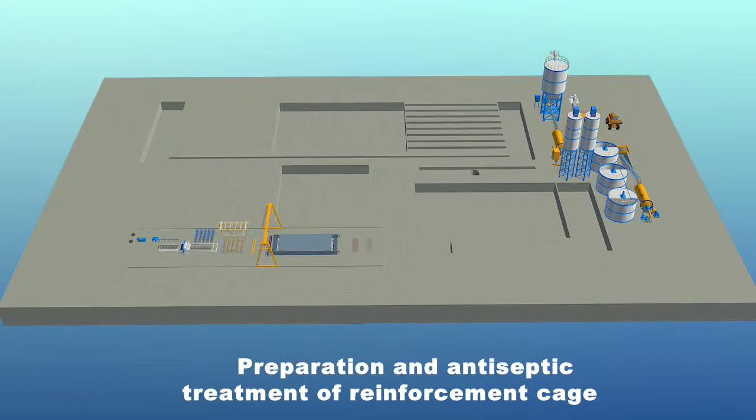Dongyue Machinery Group Aerated Lightweight Concrete (ALC) plate production line has the following 6 sections: preparation and storage of raw materials, preparation and antiseptic treatment of reinforcement cage, batching, pouring and rod inserting, static curing and rod extraction, cutting and regrouping, autoclaved curing and finished product processing, etc.

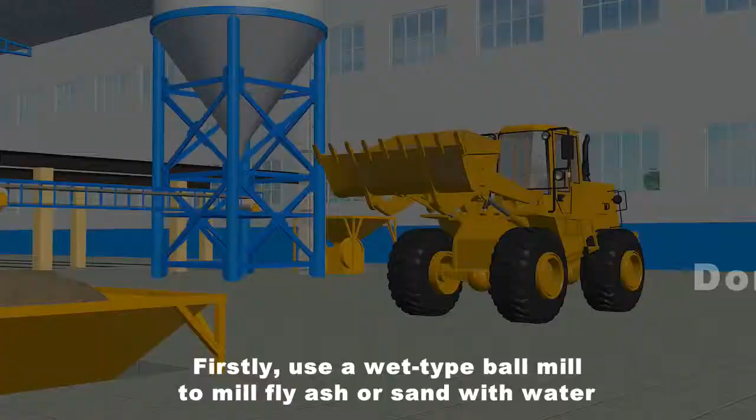Firstly, use a wet-type ball mill to mill fly ash or sand with water into a certain concentration of slurry and store it in slurry tanks.

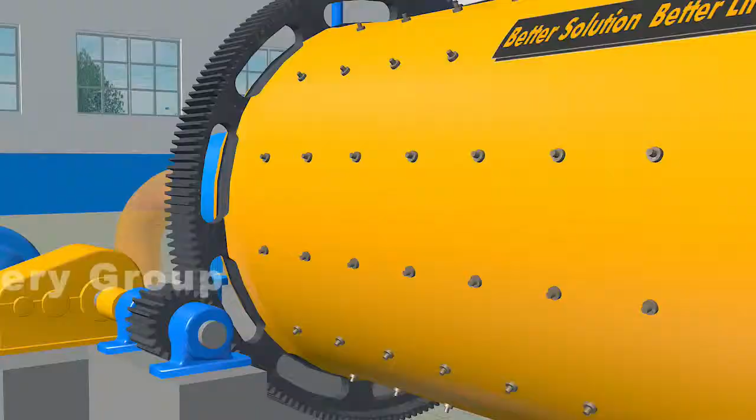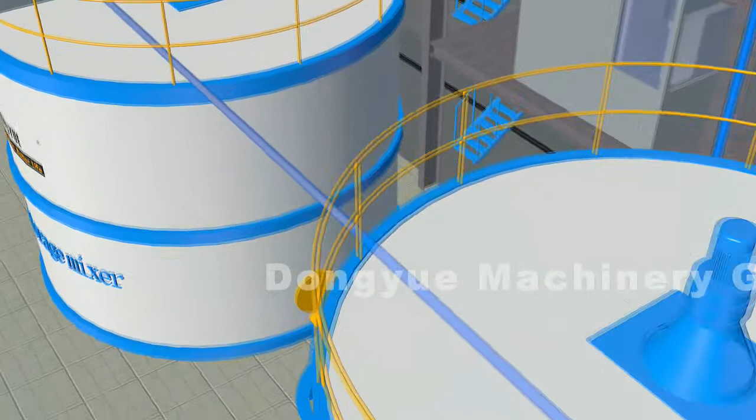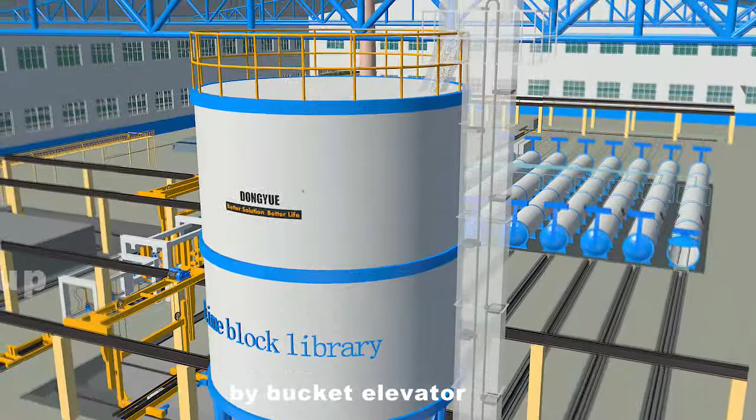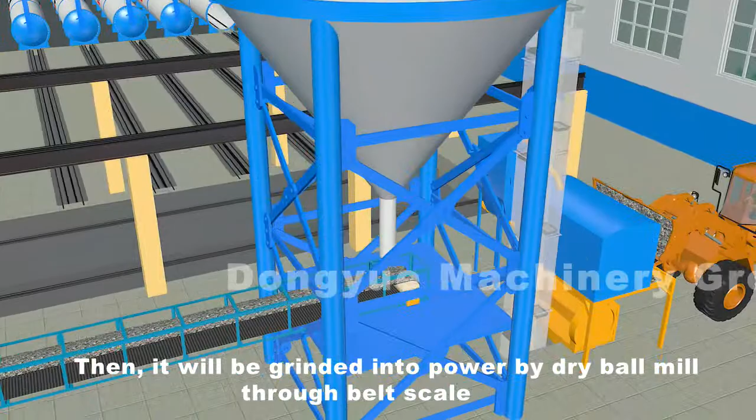Limestones are loaded into a jaw crusher for crushing and stocked into the lime block silo by bucket elevator. Then it will be ground into powder by a dry ball mill through a belt scale.

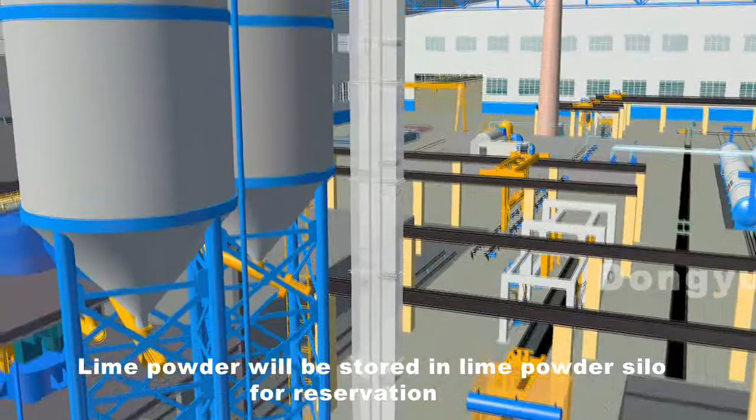Lime powder will be stored in the lime powder silo for reservation. Raw material preparation and transportation processes are equipped with dust cleaners to ensure the environment is free from pollution.

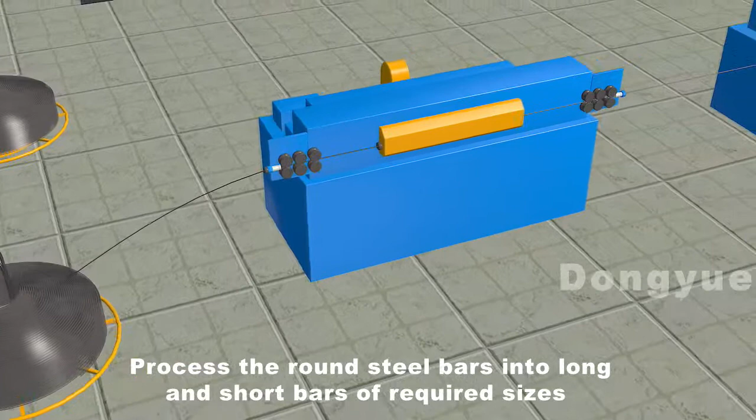Process the round steel bars into long and short bars of required sizes with a straightening cutting machine. Put these processed bars on the net welded machine frame for automatic welding.

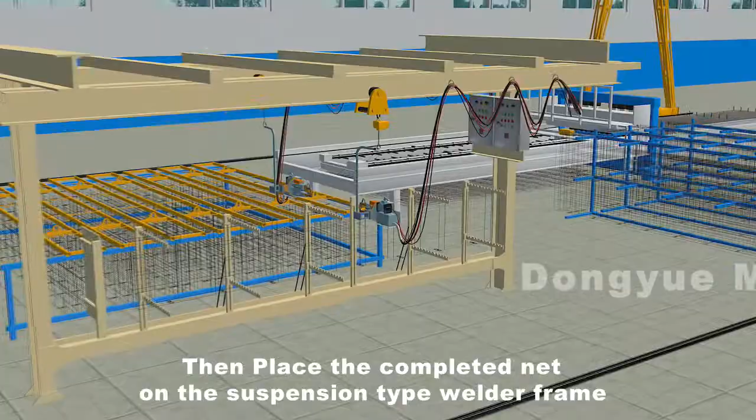Then, place the completed net on the suspension-type welder frame. Adjust the dimension and location, and weld the required mesh cage with the mesh welder, lifting the cage to the groove for dipping paint of corrosion remover by a special cage sling, ensuring that the surface of the cage is fully painted with the remover.

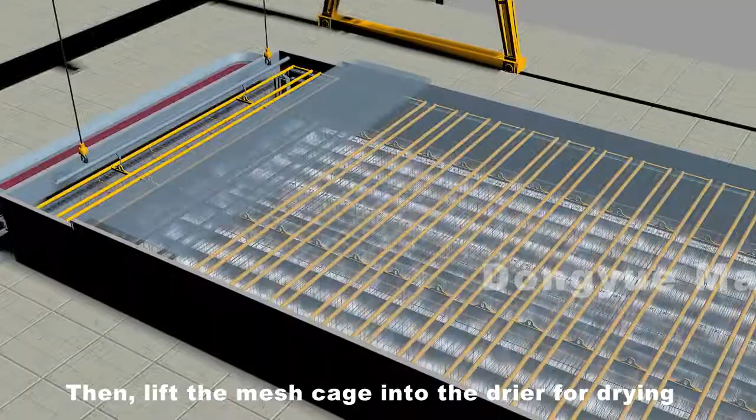Then, lift the mesh cage into the dryer for drying. After drying for 10 minutes, lift the mesh cage to the assembly area for assembling.

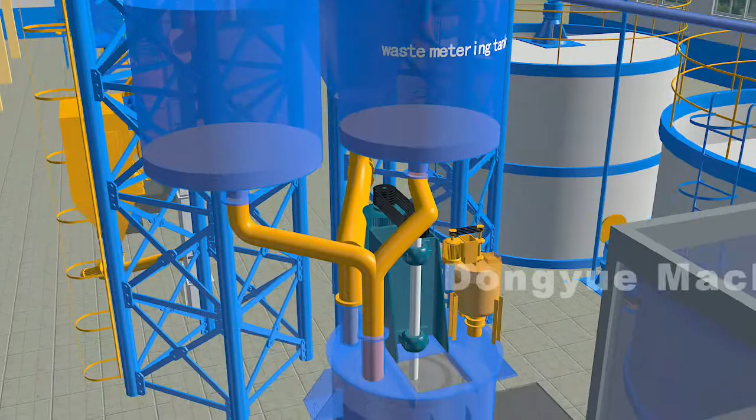Slurry is measured by a slurry scale, lime and cement are measured by a dry material scale, and aluminum is measured by an aluminum scale. Pour the above raw materials into the pouring mixer by order. After 2 to 3 minutes of high-speed mixing, pour into the mold box.

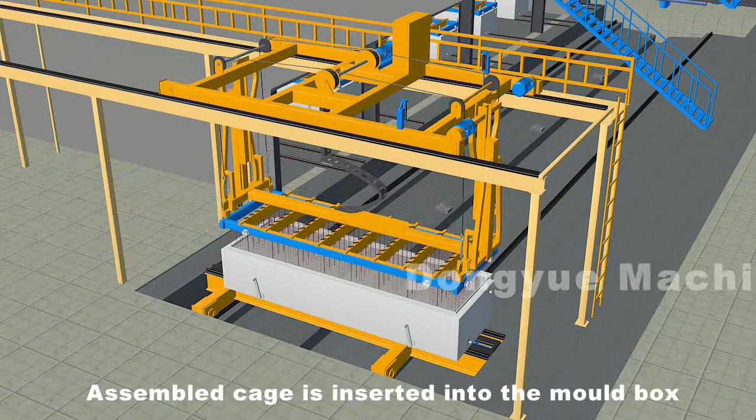When the pouring is completed, the ferry car carries the mold box to the place for rod inserting. The assembled cage is inserted into the mold box by the rod inserting hanger. The position of the mesh cage is fixed by steel bars.

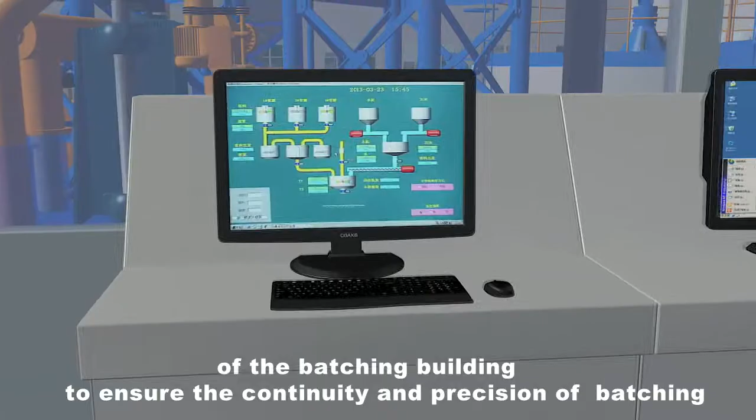The processes above are under the integrated control of the batching building to ensure the continuity and precision of batching, pouring, and rod inserting. After rod inserting for the mold box is completed, convey the mold box with the friction gear.

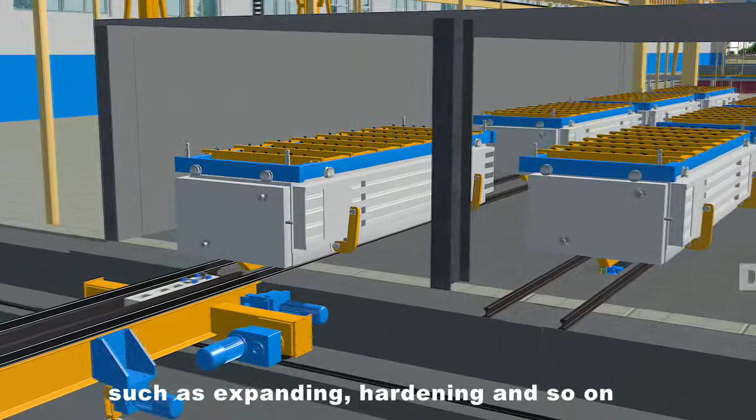To the static curing room for 2 to 3 hours of storage. A series of physical and chemical changes, such as expanding and hardening, happen to the slurry in the mold box under the function of lime, cement, and water.

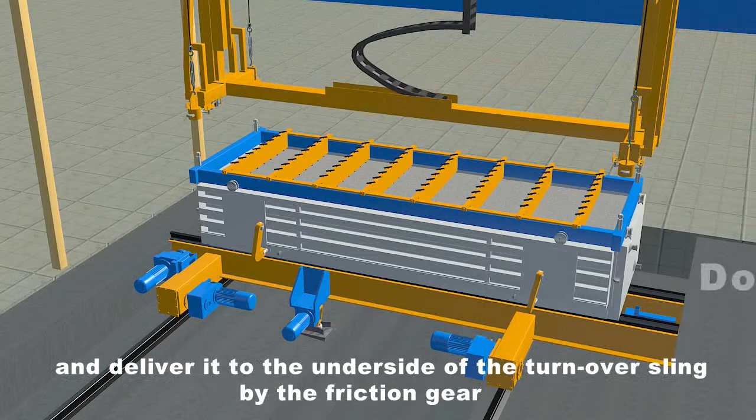When it reaches the strength for cutting, convey the casting box with the friction gear to the place for rod removing. Then remove the whole rod frame with the rod removing sling and deliver it to the underside of the turnover sling by the friction gear.

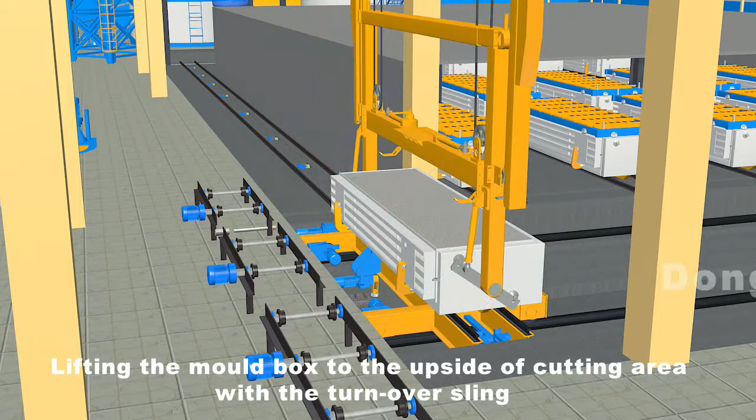Lifting the mold box to the upside of the cutting area with the turnover sling, turning the casting box by 90 degrees with the turnover equipment, and laying the casting box sideways on the number 1 cutting trolley. Then the mechanical arm of the turnover sling will automatically unlock the locking arm and achieve demolding.

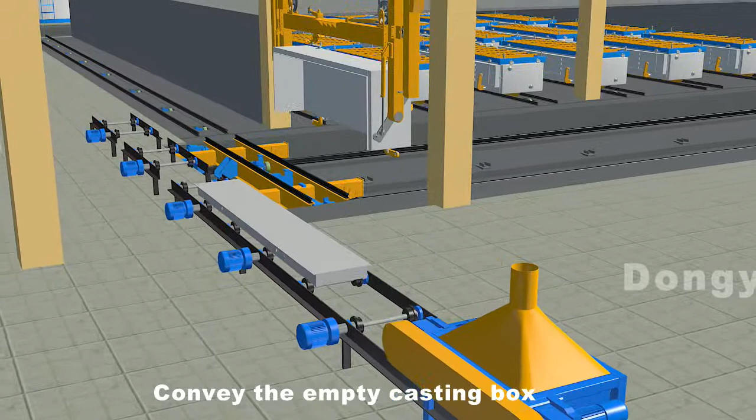Convey the empty casting box to the recycling line of side plates with the turnover sling and reassemble the empty casting box with the side plate.

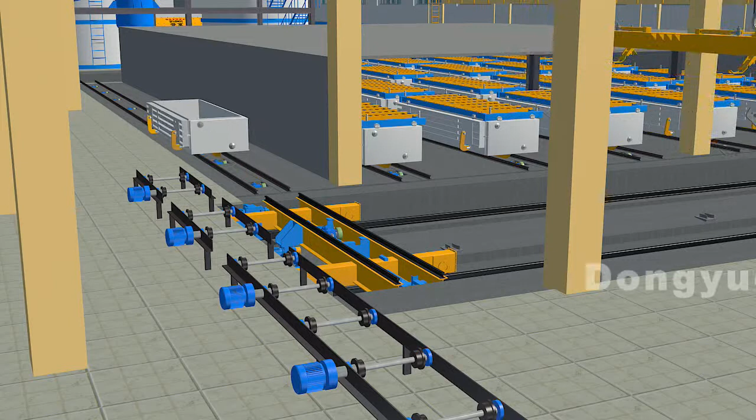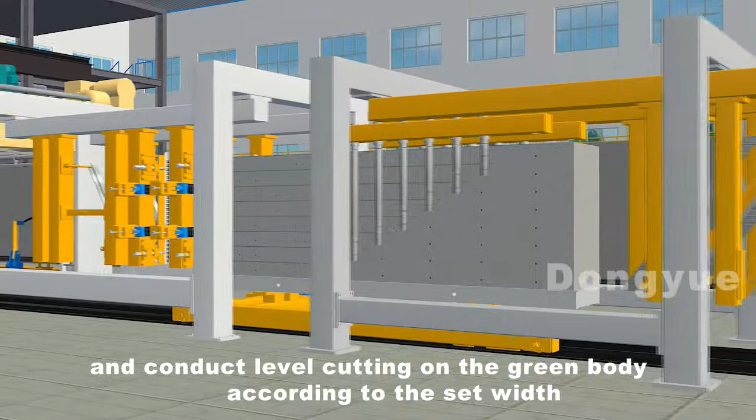In the meantime, send the green body and side plate to the cutting area with the number 1 cutting trolley. It will first pass through the level cutting equipment and conduct level cutting on the green body according to the set width. At the same time, milling flute treatment is conducted for both sides of the green body.

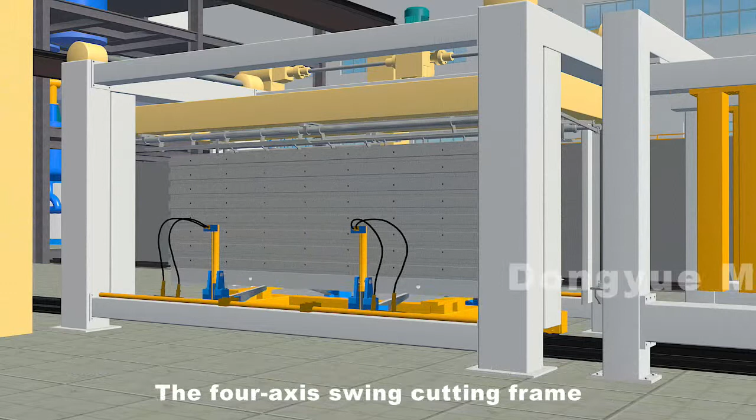Soon afterwards, the number 1 cutting trolley continuously moves to the lower side of the vertical cutting device. The green body and the side plate are jacked up by the hydraulic displacement device. The 4-axis swing cutting frame drives the wire swing in a serration type for vertical cutting.

In the meantime of cutting, the number 1 cutting trolley returns from the original path to carry the next green body. The number 2 cutting trolley moves to the lower side of the vertical cutting device.

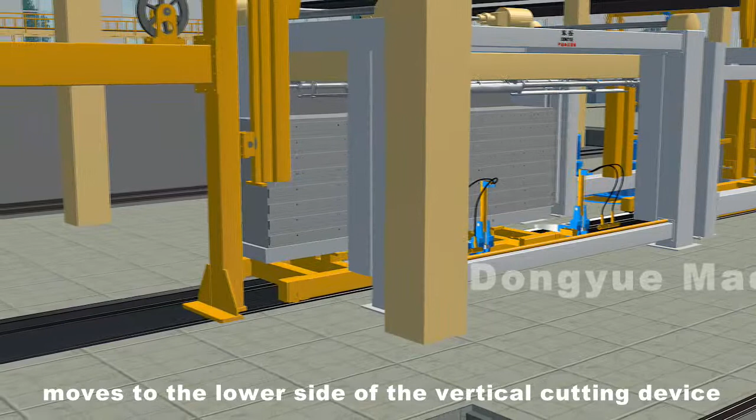After the completion of vertical cutting, the hydraulic displacement device puts the green body on the number 2 cutting trolley with the side plate. The number 2 cutting trolley moves to the lower side of the sling for semi-finished products.

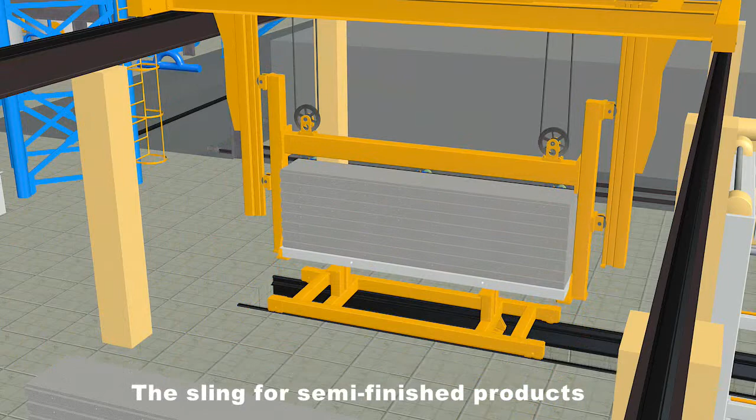The sling for semi-finished products lifts the cut green body to the steam trolley with the side plate. The grouping is completed. All wastes generated in the whole cutting process could be recycled for use.

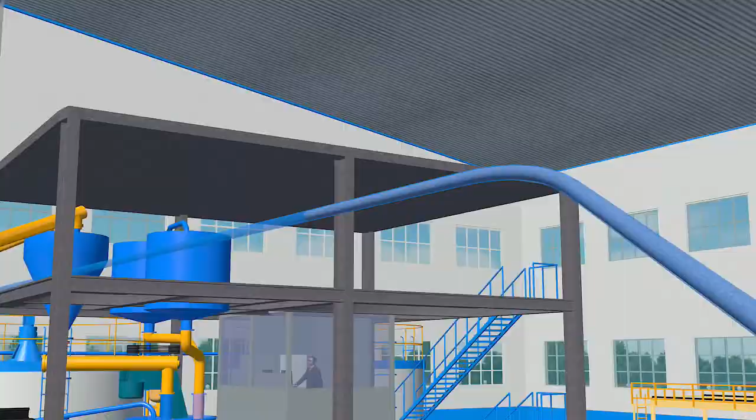The cut green body is orderly put on the autoclaving trolley with the side plate. The dragger before the autoclave sends the grouped steam trolley to the autoclave with the green bodies.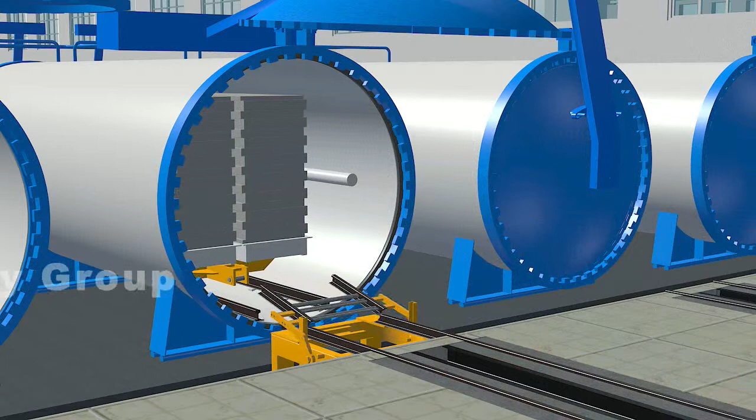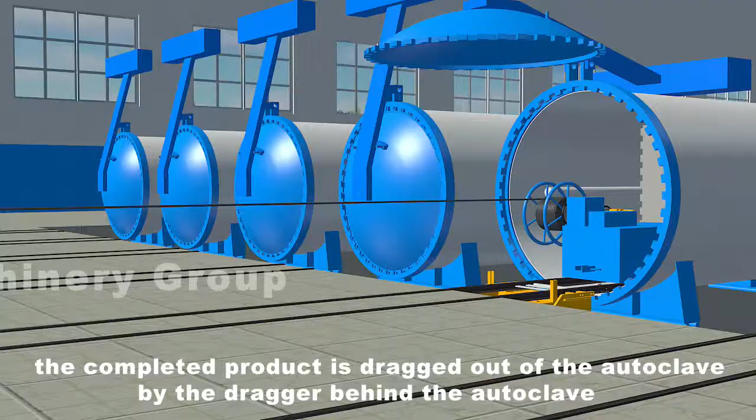After 8 to 10 hours of high temperature and high pressure curing, the completed product is dragged out of the autoclave by the dragger behind the autoclave.

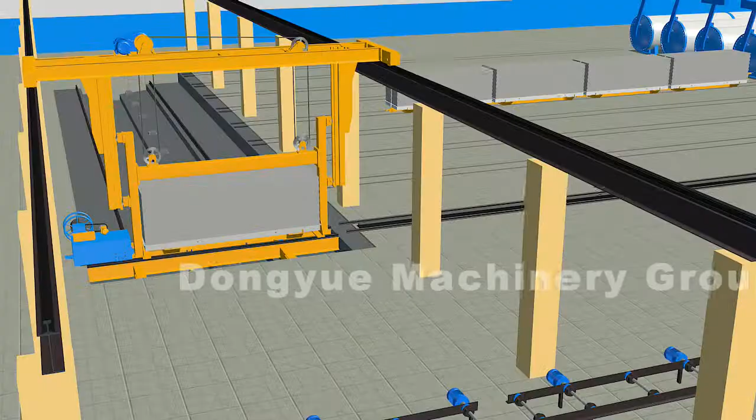The completed product is put on the side plate transport line with the side plate by the sling.

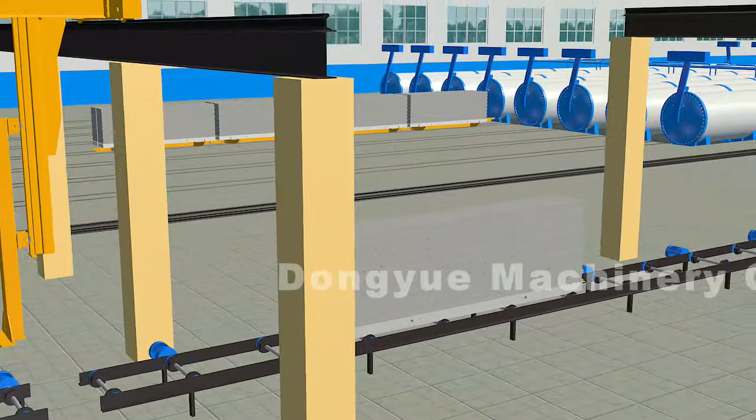The completed product and the side plate move to the lower side of the mobile separating machine for separating from the upper layer to the lower layer.

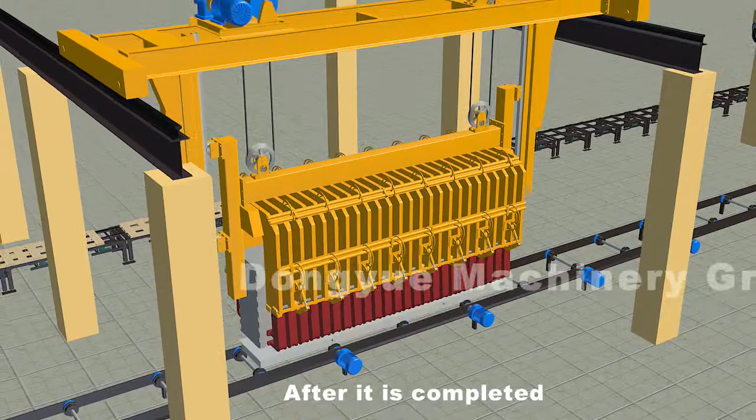After it is completed, the moving separating machine clamps all finished products and lifts them to the finished products transport line and sends them to the storage yard.

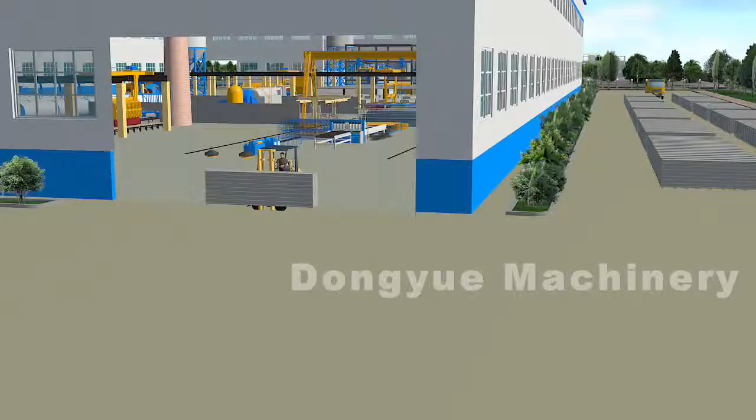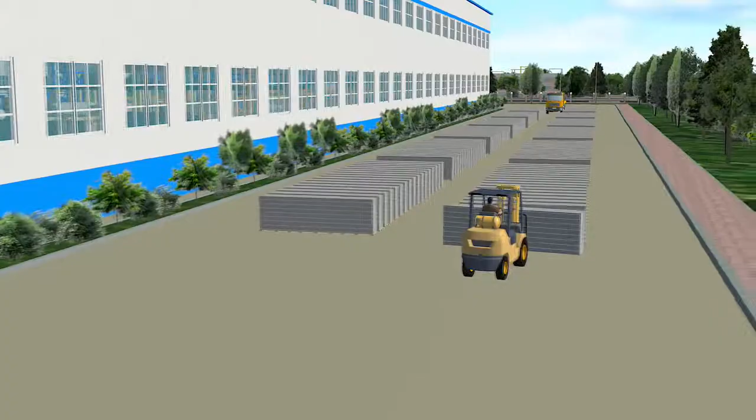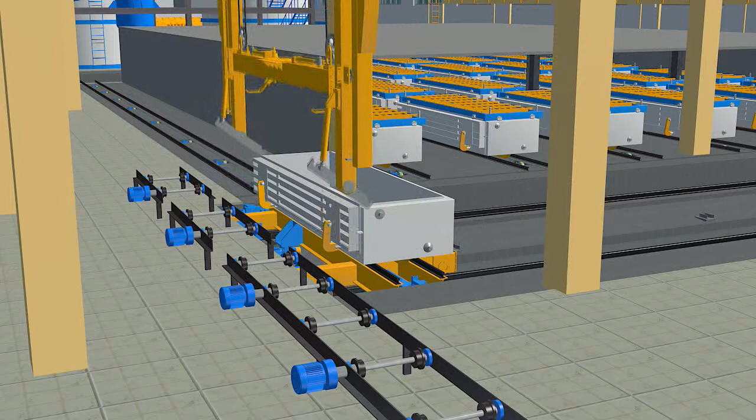In the meantime, the side plate is cleaned on the transport line and reassembled with the mold box. The steam trolley returns to the front of the autoclave for grouping.

The workflow above is repeated in the whole production line continually.